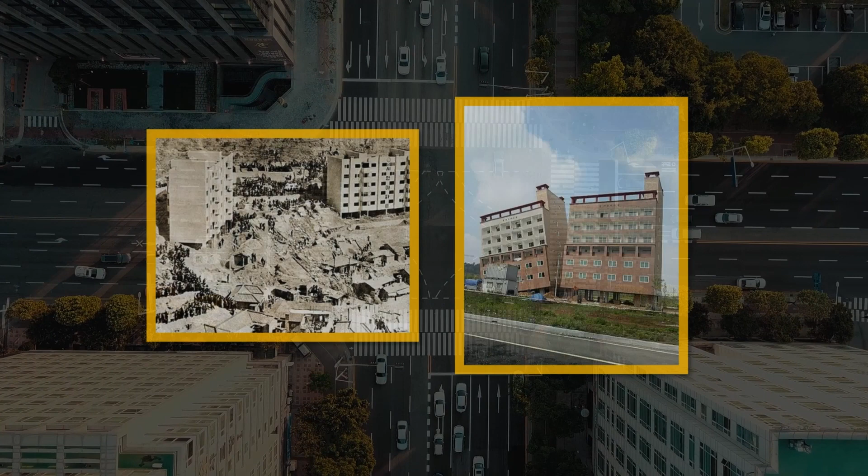So, let's get into the story of this week. What are the top priorities when constructing a building? It's safety. If a building that we live in collapses like this, it will never feel safe. The apartment that will be constructed on our site will also have big problems if it collapses like this. So, let's think about how to make our buildings stand safely together.

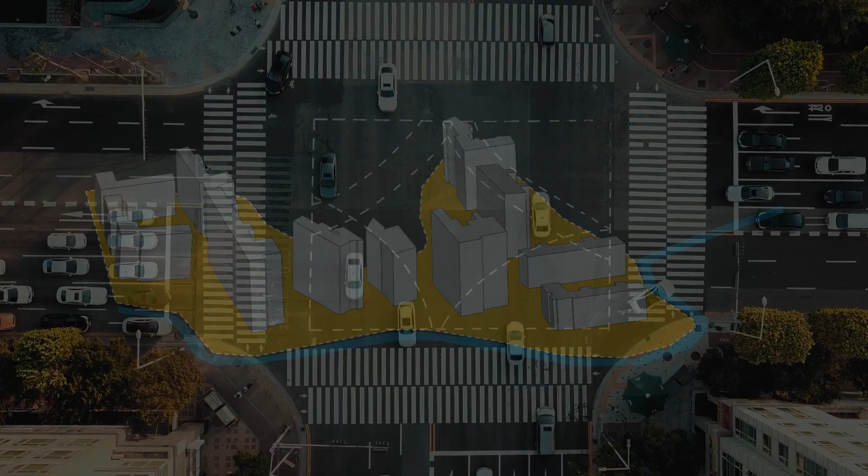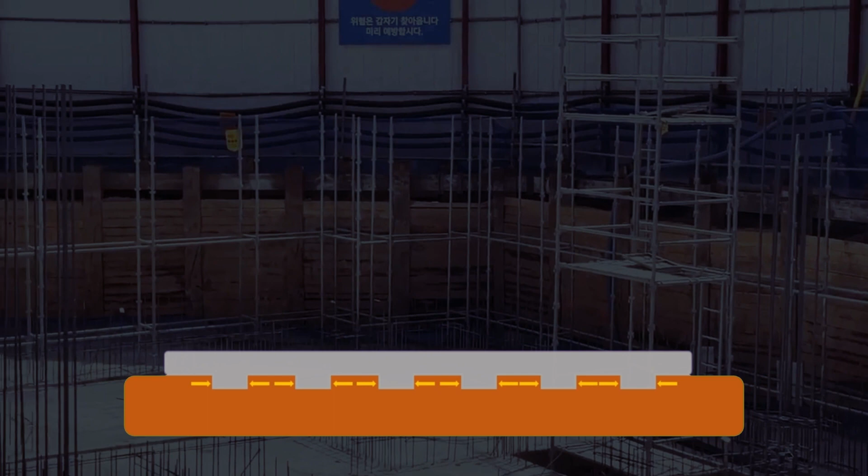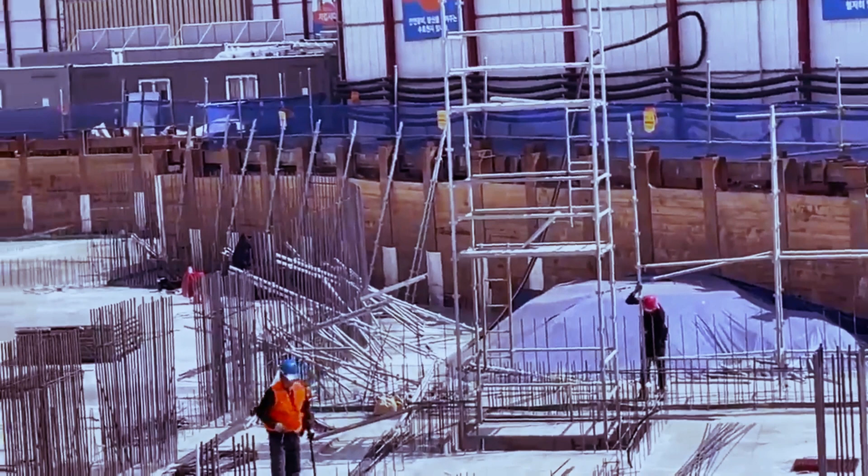The thing that we have to consider importantly is the foundation work that is needed to make the bottom of the structure stronger. Foundation work strengthens the ground to support high-rise apartments. As poor foundation work might cause a building to collapse or sink, it is highly dangerous, so the foundation work is very important. On that matter, this week we are going to talk about the foundation work.

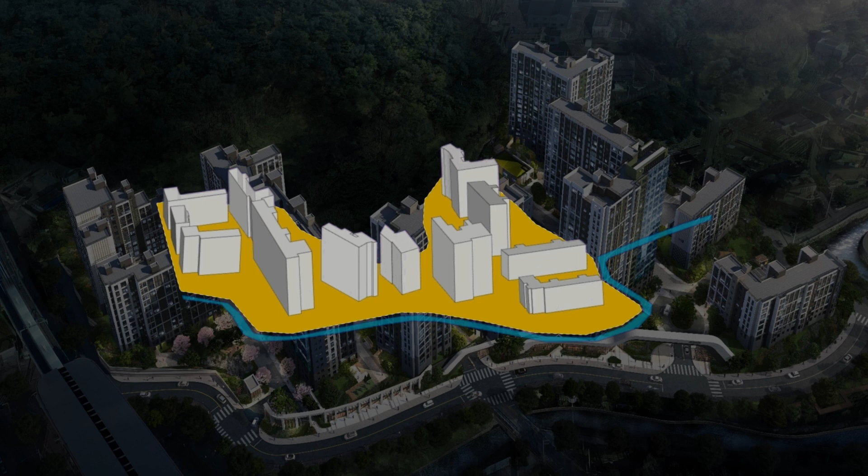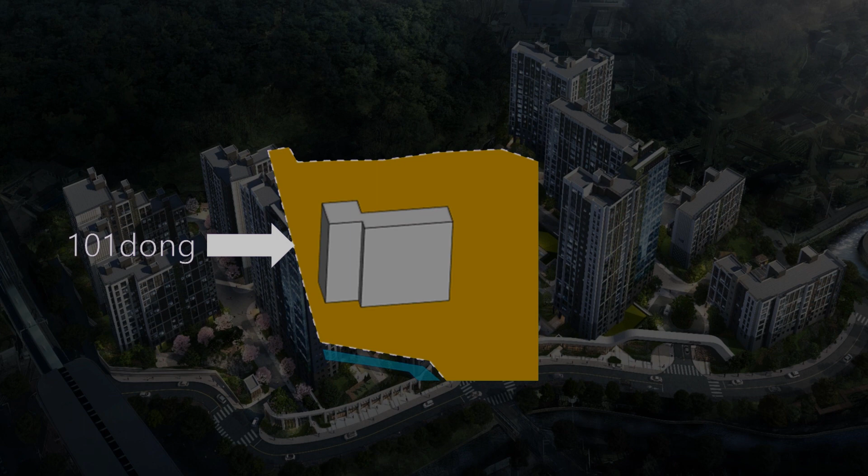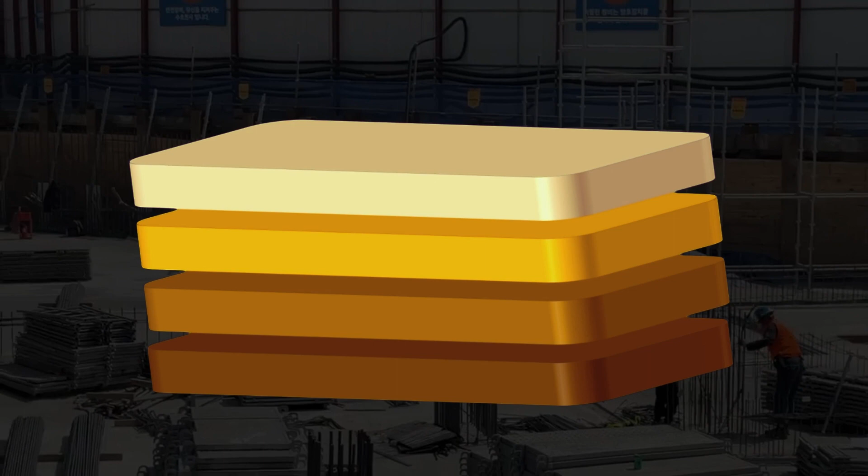From now on, let's find out what kind of foundation work was used to maintain safety for each specific area of this apartment, starting with building 101 over here. The foundation construction of 101 Dong is called pile footing. The pile footing is the foundation method used when the foundation is not firm. In other words, it is used by inserting a pile into the rock layer of the ground to support the structure when the strong ground is deeply located on the site and the foundation is not directly reached.

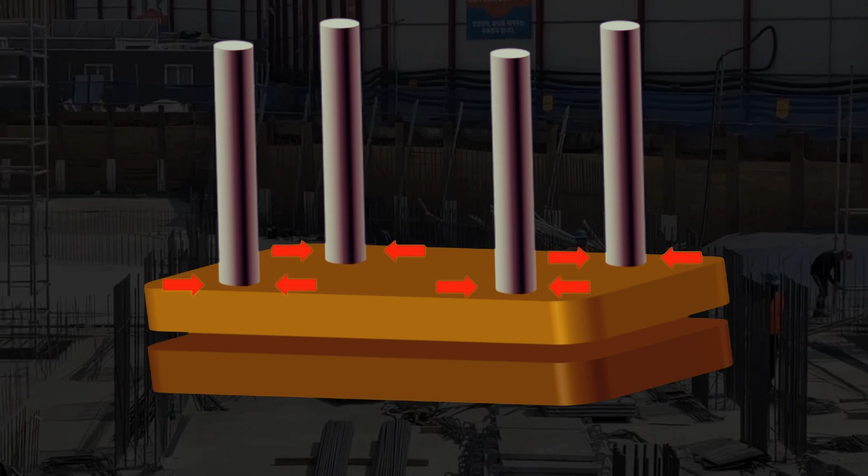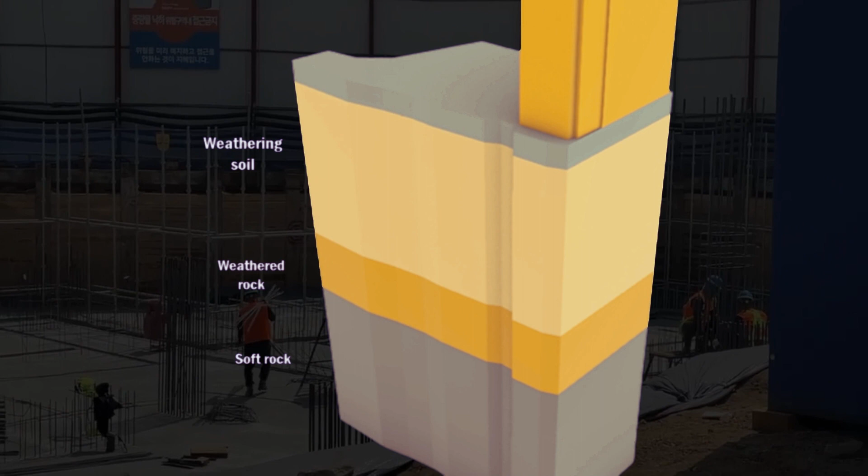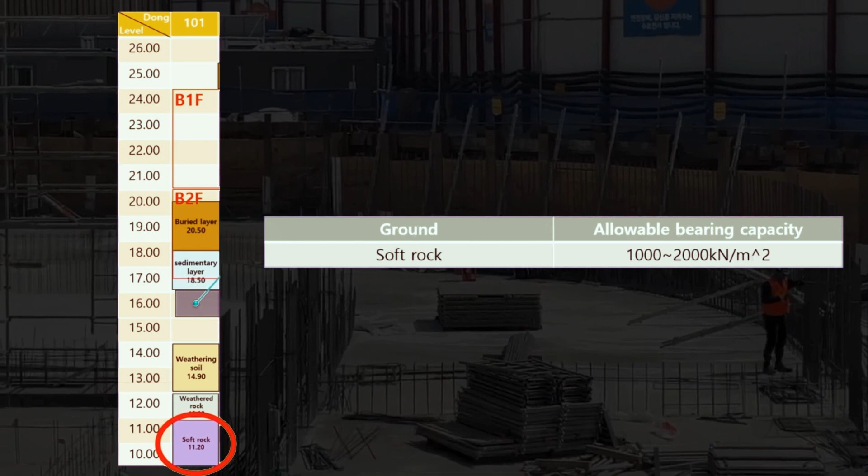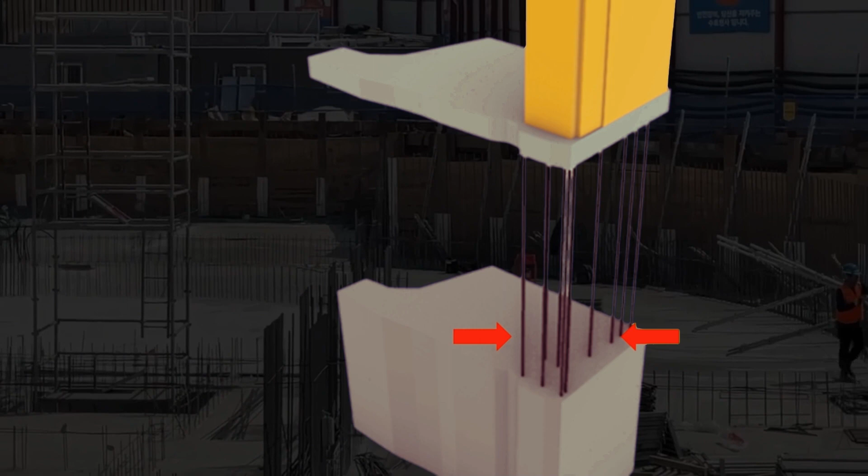So, why is the pile footing used? This is because 101 Dong has these characteristics. The strong ground is located somewhat deep, so the ground on the site is not that hard. The strong ground that is deep on this site is the soft rock layer. The soft rock layer has an allowable bearing capacity of 1000 to 2000 kN per square meter and belongs to a solid rock. Therefore, the foundation must be formed in the soft rock layer which is located deep. So the pile footing method is appropriate for the foundation of 101 Dong.

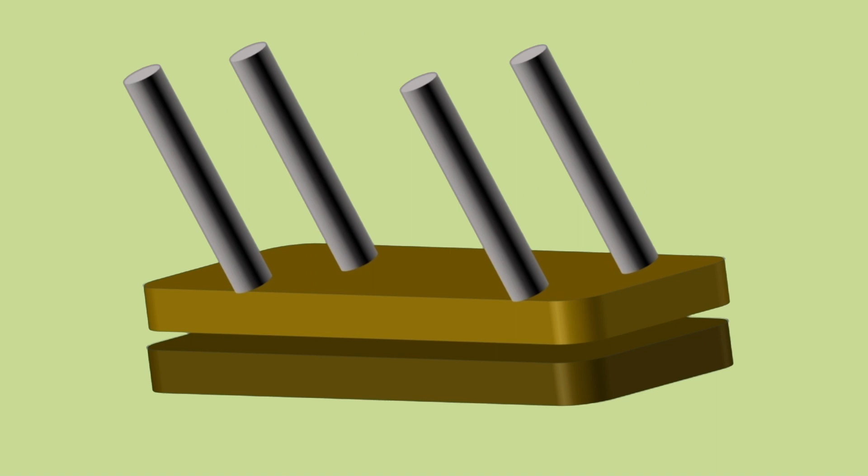In the process of constructing a pile foundation, it is important to check the pile is at a right angle after inserting it into the ground. It is because if the angle is wrong, the pile will accept load unequally, thus threatening the safety and the building's lifespan. That's the end of building 101 foundation work.

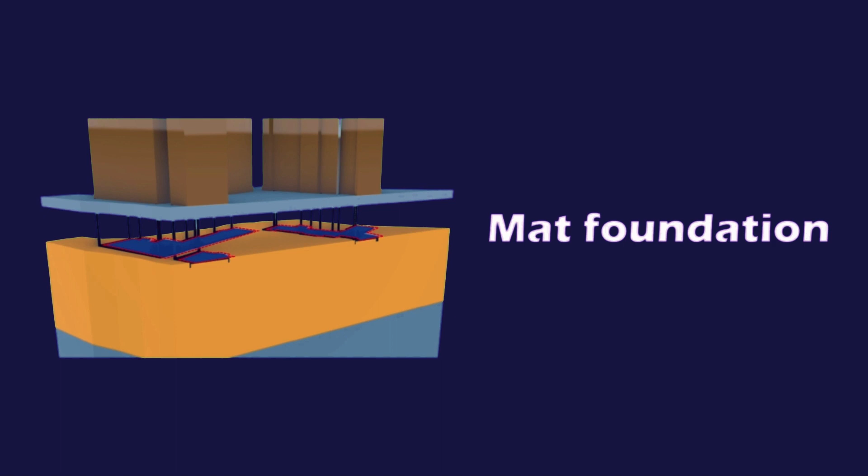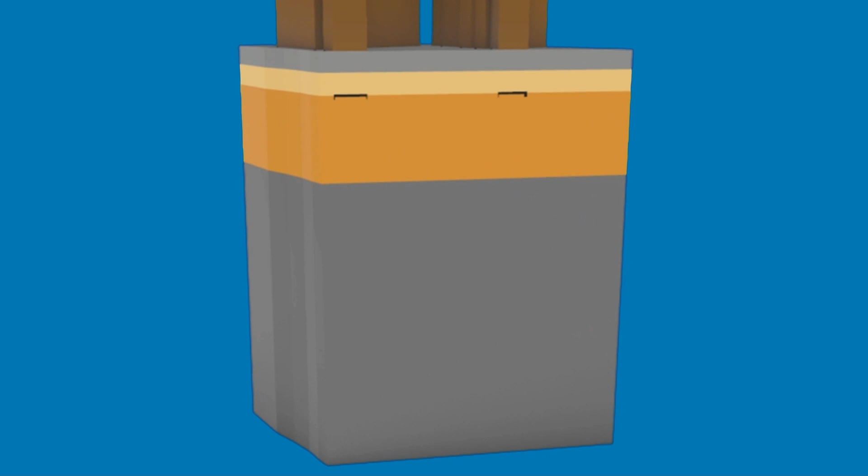Next, let's move on to the site for buildings 102 to 104. In this area, mat foundation type will be used. Mat foundation is a foundation that supports columns or walls continuously throughout a structure on a single foundation. Simply put, it supports the entire floor with one mat foundation. Why should mat foundation be used here? Here is the left side of our site, and weathered rock layers are mainly distributed here. One of weathered rock's characteristics is the low bearing capacity, so this area is expected to support a smaller load.

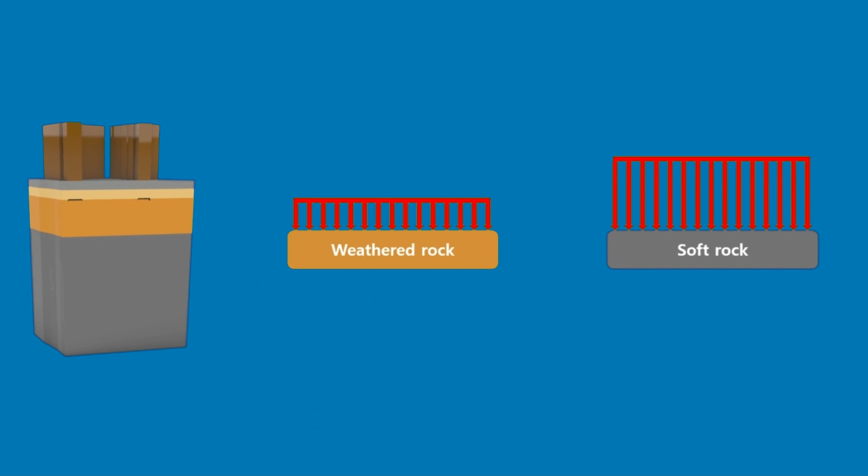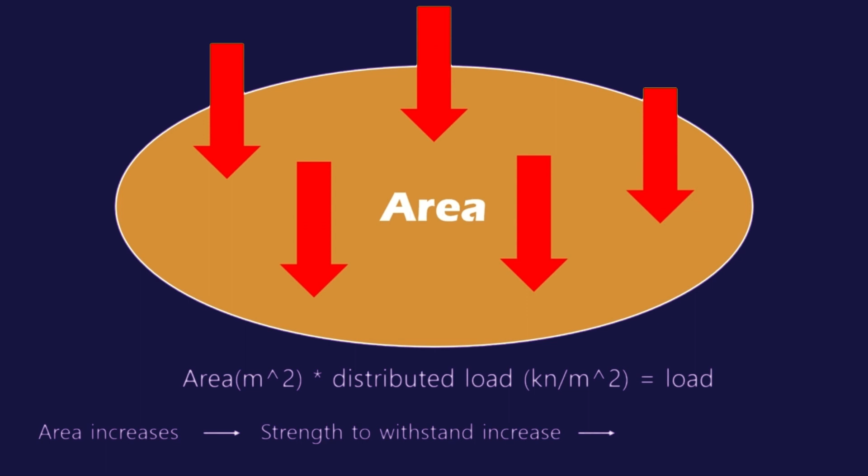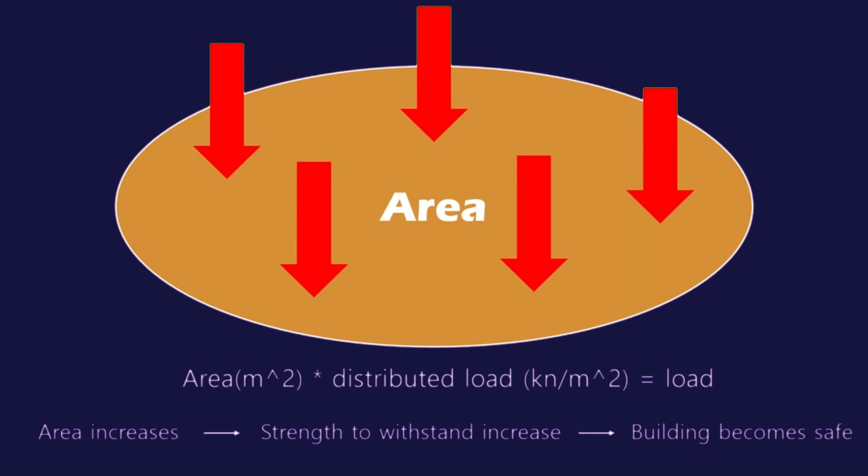Fortunately, in this situation, compared with 101 Dong, the hard rock that can support the loads was not located as deep. Even if the weathered rock layer has low bearing capacity, if the area that transmits force to the ground increases, more power can be obtained. Also, if the ground layer that the large foundation must reach is relatively not deep, it is easy to construct a large foundation into the solid geological layer. Therefore, we used mat foundation for this part because this type is suitable for areas with low bearing capacity, and because the hard soil layer is not too deep underground. Now, the foundation work for buildings 102 to 104 is finished by mat foundation.

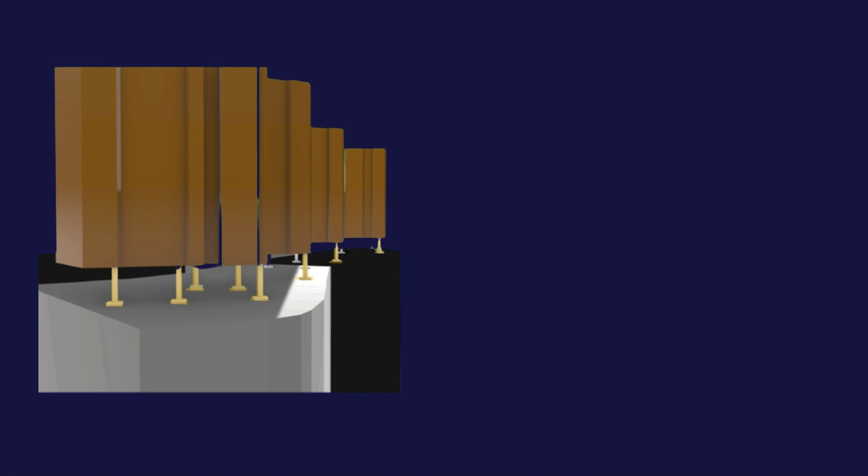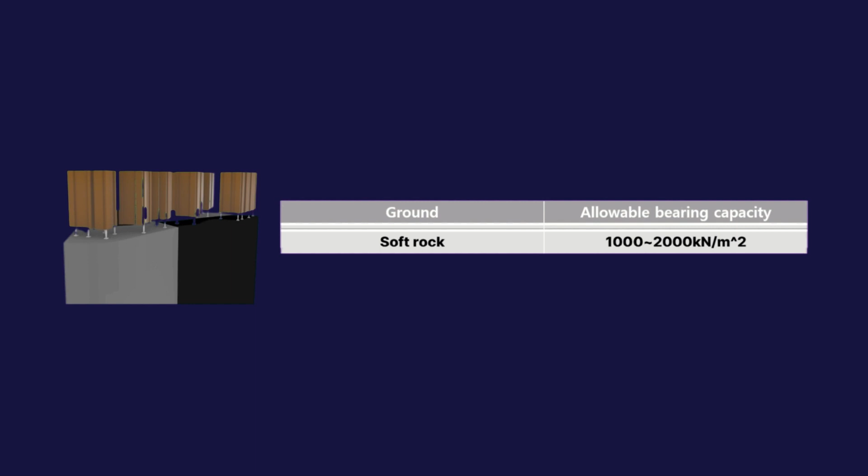Lastly, 105 Dong to 112 Dong. The foundation for this part will be individual footing. Let's find out why. The strata formed on this site include the soft rock layer and the hard rock layer. As I mentioned earlier, soft rocks have high allowable bearing capacity, and hard rocks are 4,000 kN per square meter, which is even higher than soft rocks. In addition, individual footing has an advantage for use on ground which has high bearing capacity.

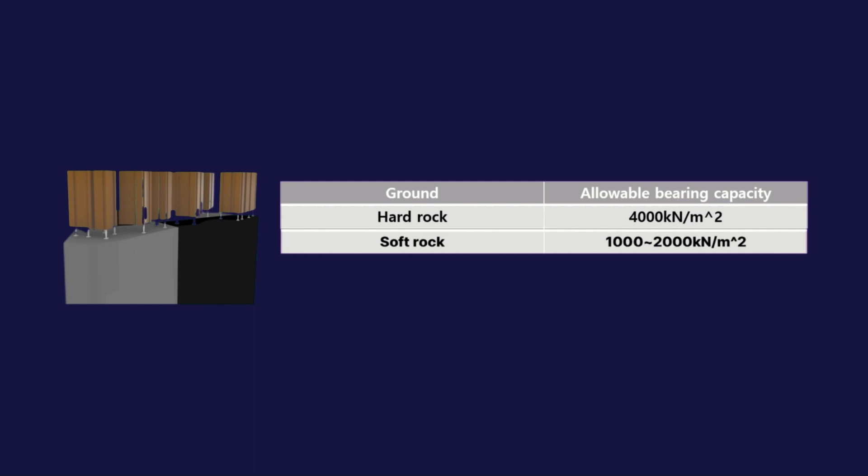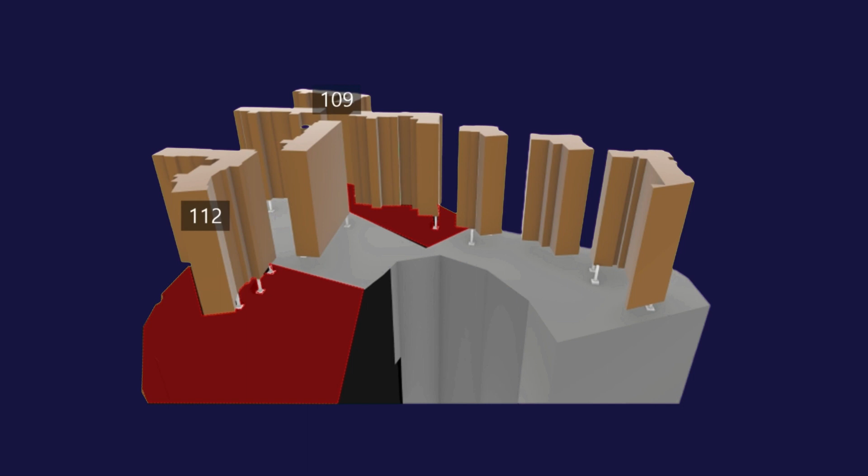If you look more closely at the site, 105 Dong to 107 Dong and 110 Dong and 111 Dong are located in soft rock layers, and 108 Dong to 109 Dong and 112 Dong are located in places where hard rock layers are not deep. Therefore, individual footing is selected for our site. By the way, if you look at the site, it seems that the foundation you can see is just 105 Dong to 107 Dong, even though the same individual footing is used. What will be the reason? The reason was the ground characteristics of 108 Dong to 112 Dong.

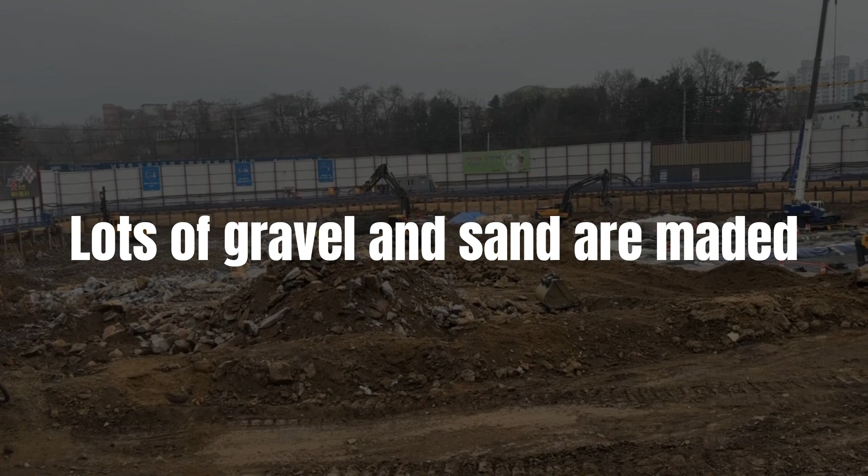As mentioned earlier, the site was mainly formed with hard rock layers, so blasting was required when digging, and the construction period became longer. Shall we watch the blasting scene together? If you look at the blasting process, you can see that a lot of gravel and sand are produced in the process. Also, gravel and sand produced by the explosion are compressed by about 5 centimeters when the load is applied above.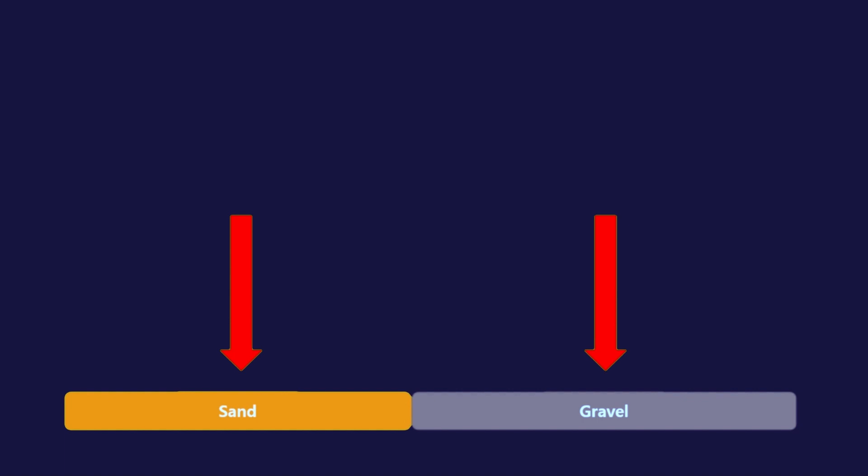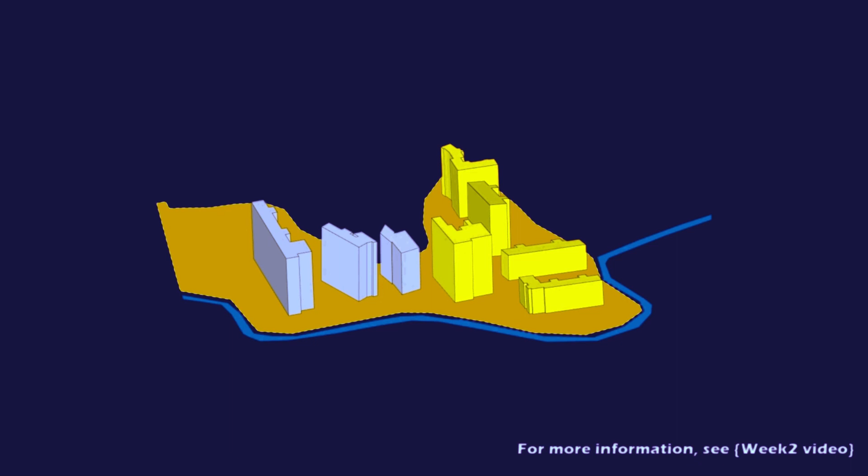Therefore, the site must use blasting for foundation work and must be dug in consideration of the gravel and sand produced by the blasting. For this reason, the site of 108 Dong to 112 Dong will appear later than the site of 105 Dong to 107 Dong. Although the foundation process began late, it was not a problem due to the similar construction period, because 108 Dong to 112 Dong have a lower height than 105 Dong to 107 Dong.

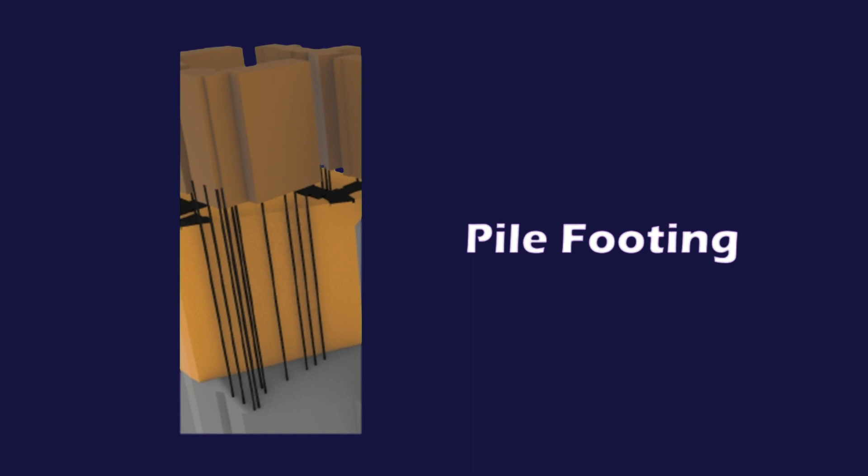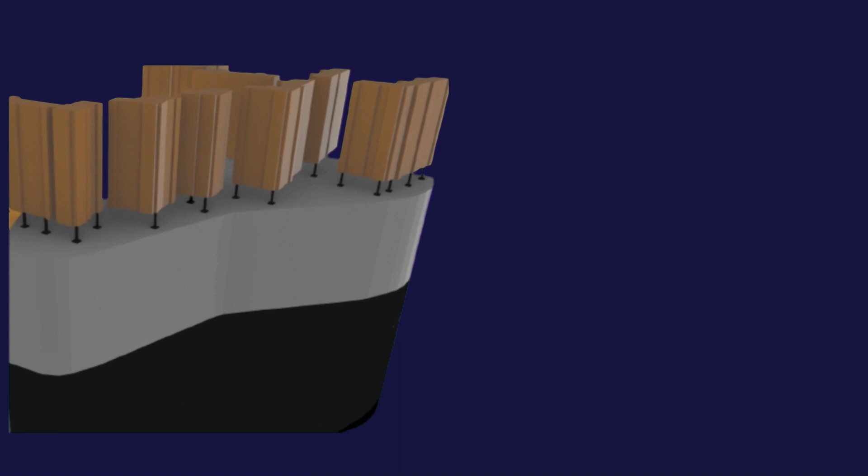Finally, the foundation work for the overall construction of Hanyang Sujain Riverpine apartment has been completed. 101 Dong, with deep ground that can withstand the load of the building, used pile footing. The site of 102 Dong to 104 Dong, with small load that the ground can withstand but where the hard ground layer is not deep, used mat foundation, and the hardest ground location for buildings 105 Dong to 112 Dong used individual footing. Although it was in the same apartment site, the problems raised by different characteristics and ground properties were solved by using various types of foundation construction methods. Next time, we will talk about the problems that occurred during the construction process.